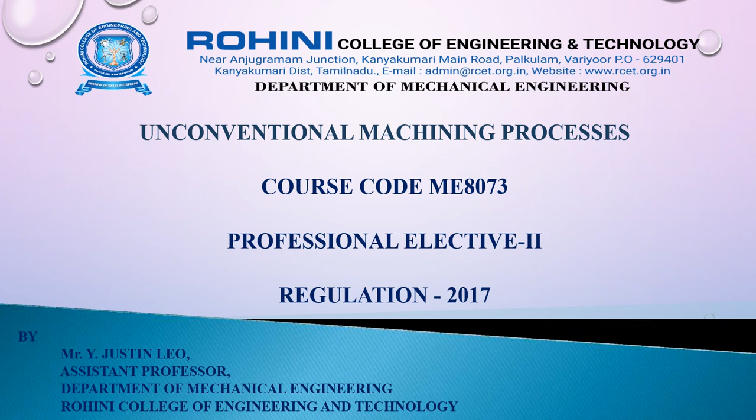And the course code is ME8073, and it is a professional elective subject for the mechanical engineering students, Regulation 2017. So here in this video session, we'll be studying the first unit, that is Introduction and Mechanical Energy-Based Processes, in which we'll be studying about mechanical energy-based unconventional machining processes.

So the main objective of studying this unconventional machining process is to learn about various unconventional machining processes and the various process parameters and their influence on performance and their application. So here in the first unit, Introduction and Mechanical Energy-Based Processes, we have the syllabus: Unconventional Machining Process, its needs, classification, merits, demerits, and application.

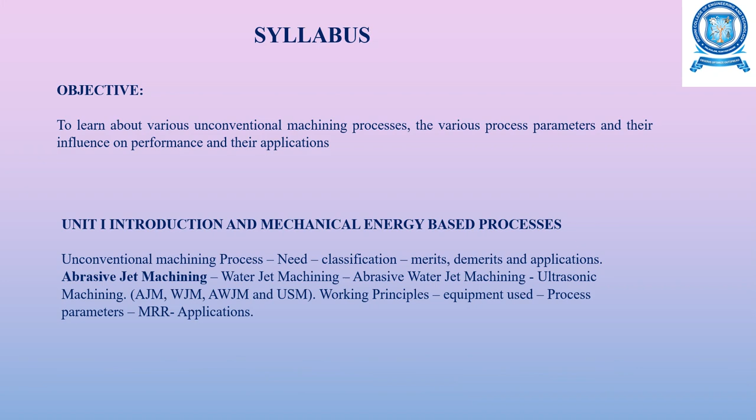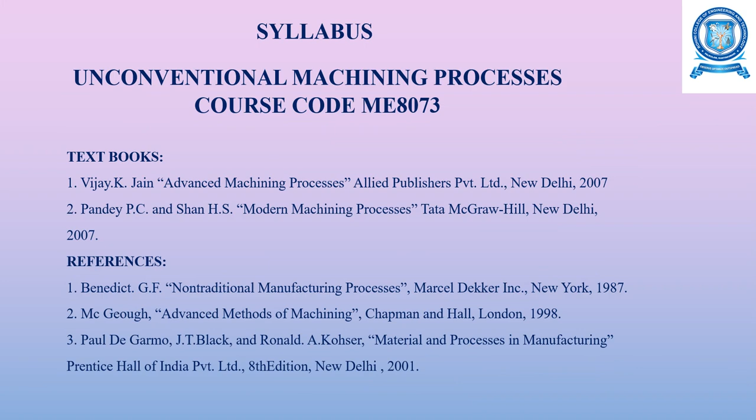And in the mechanical energy-based processes, we'll be studying about abrasive jet machining, water jet machining, abrasive water jet machining, ultrasonic machining, and the working principles, the equipment used, the process parameters, and its applications. So these are all the textbooks and the reference books for this course. So these are all the course outcomes.

So the students, upon completion of this unconventional machining processes course, in the first unit, will be able to explain the need for unconventional machining processes and its classification. In unit 2, the students will be able to compare various thermal energy and electrical energy based unconventional machining processes. And upon completion of the third unit, the students will be able to summarize various chemical and electrochemical energy based unconventional machining processes.

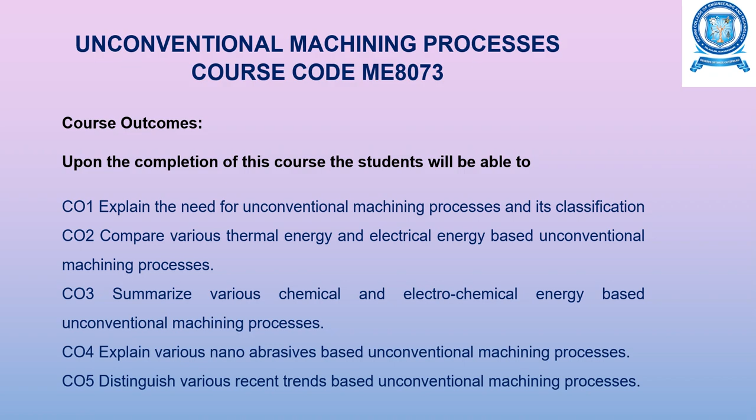In the fourth unit, the students will be able to explain various nano-abrasive based unconventional machining processes. And finally, in the fifth unit, the students will be able to distinguish various recent trends based unconventional machining processes. So in mechanical energy based unconventional machining processes, you have almost 4 types, that is abrasive jet machining, water jet machining, abrasive water jet machining, and ultrasonic machining.

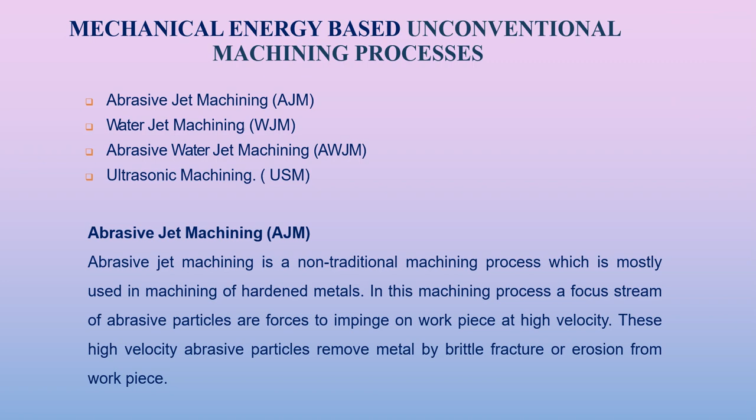Abrasive jet machining is one of the non-traditional machining processes, mostly used in machining of hardened metals. In this process, a focused stream of abrasive particles is forced to impinge on the workpiece at a high velocity. These high velocity abrasive particles remove the metal by brittle fracture or by erosion from the workpiece. In mechanical based processes, we'll be studying about the abrasive jet machining process in this video session.

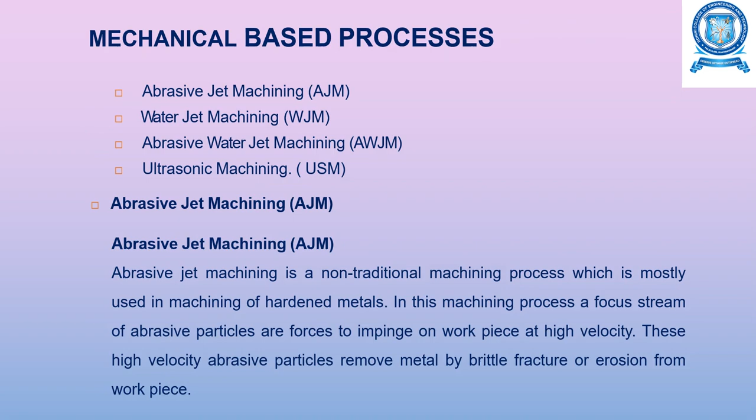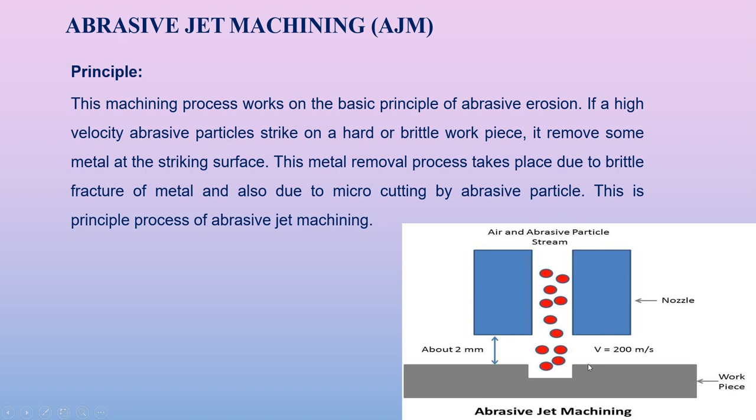The machining process of abrasive jet machining works on the basic principle of abrasive erosion. As you can see from the figure, high velocity abrasive particles are made to strike on a hard or brittle workpiece, and this removes some metal at the striking surfaces. This metal removal takes place normally due to brittle fracture of the metal, and also due to micro cutting by the abrasive particles. This is the principle of abrasive jet machining.

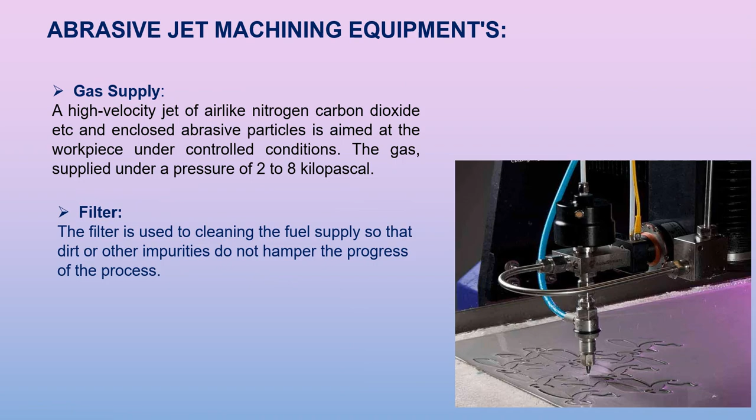So the first is the gas supply. A high velocity jet of gas like nitrogen, carbon dioxide, etc. with enclosed abrasive particles is aimed at the workpiece, under a pressure of 2 to 8 kilopascals. And you have a filter, which is used for cleaning the supply so that any dirt or other impurities may not hamper the progress of the process. And you have the pressure gauge, the pressure regulator.

So it is used to control the pressure of the compressed gas used in the abrasive jet machining, as the pressure decides the depth of the cutting and the amount of force required for cutting. So the pressure gauge is very, very important here.

And you have a mixing chamber, and in this mixing chamber the abrasive powder is being fed, and with the help of a vibrator, the amount of abrasive can be controlled, so that the abrasive and the gases will be mixed thoroughly in the mixing chamber.

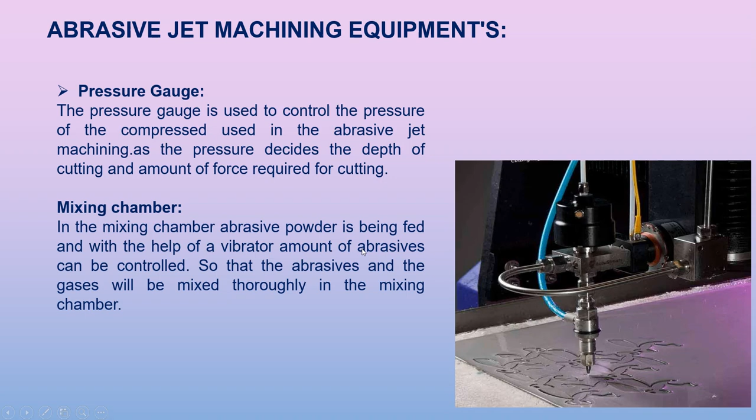So next is the cutting nozzle. You have here the cutting nozzle. To direct the abrasive particles on the workpiece, cutting nozzles are used, and they are mostly made of tungsten carbide, and they may be available in both circular and square cross section, and its life is usually low, about 30 hours for tungsten carbide. And next is the abrasive particles.

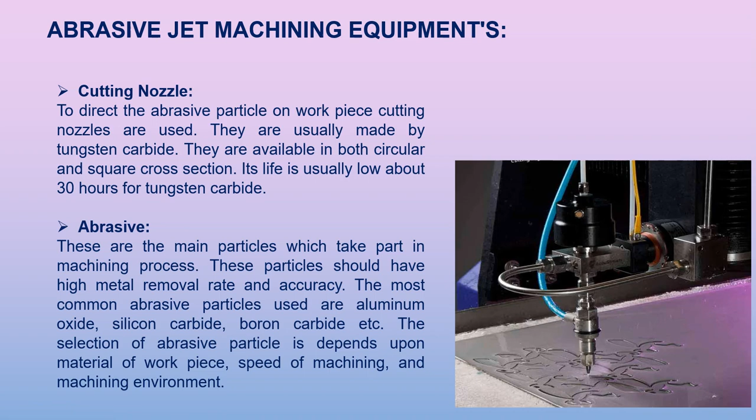So these are the main particles which play a vital role in this machining process. And these particles should have high metal removal rate, and the accuracy should be more. And the most common particles normally used are silicon carbide, boron carbide, and aluminum oxide. And depending upon the workpiece, the selection of abrasive particle is made, and it is also selected based on the speed of machining and the machining environment.

And next is the abrasive jet machining working. So, working process of abrasive jet machining. The basic concept present in abrasive jet machining is nothing but abrasive erosion or metal cutting by high velocity abrasive particles. And the working process can be summarized by the following points. So the first is the gas or air is compressed in the gas compressor. Here the density and pressure increase.

And second, the compressed gas is sent to the filtration unit, where the dust and other suspended particles are removed. And after this, the clean gas is sent to the dryer, and this dryer unit absorbs the moisture from it, and it is used to avoid water or oil contamination of abrasive powder. And now this clean and dry gas is sent to the mixing chamber, where the abrasive feeder feeds abrasive particles into it, and the abrasive particle is about 50 micrometer grit size.

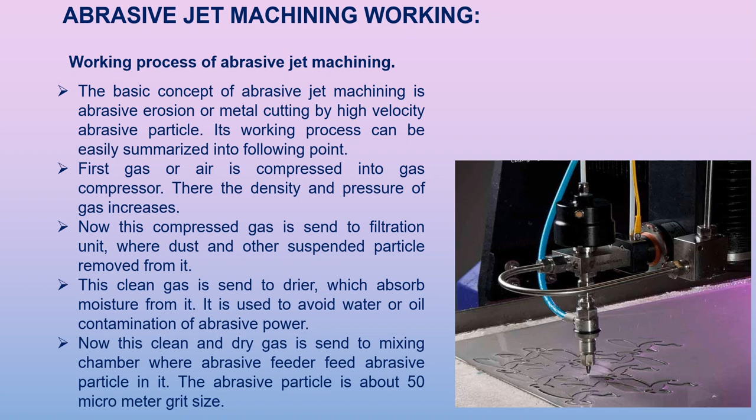So this high pressurized abrasive-carrying gas is now sent to the nozzle, where its pressure energy is converted into kinetic energy. Normally the velocity of the abrasive particle leaving the nozzle is about 200 meters per second. So the standoff distance between the workpiece and the nozzle should be about 2 mm.

Now, these high velocity abrasive particles impinge on the workpiece and remove the material by micro cutting action, as well as the brittle fracture of the work material.

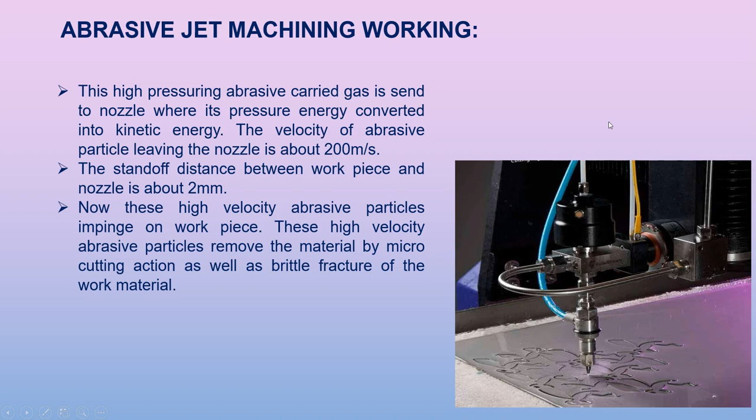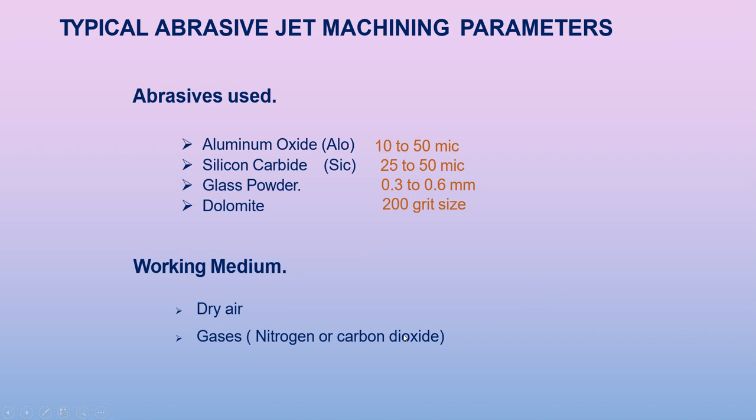So these are all the abrasive jet machining parameters. The abrasives normally used are aluminum oxide, 10 to 50 micron, silicon carbide 25 to 50 micron, glass powder 0.3 to 0.6 mm, and dolomite of 200 grit size. And normally the working medium here is dry air, and gases may be nitrogen or carbon dioxide.

And the nozzle material is normally tungsten carbide or silicon carbide. For abrasive materials, aluminum oxide grit size is 10 to 50, and the orifice diameter is 0.005 to 0.018 inch. For silicon carbide, it is 25 to 50 grit size, and the orifice diameter is 0.008 to 0.018 inch. And for glass beads, the grit size is 2500 micro inch, and the orifice diameter is 0.026 to 0.05 inch.

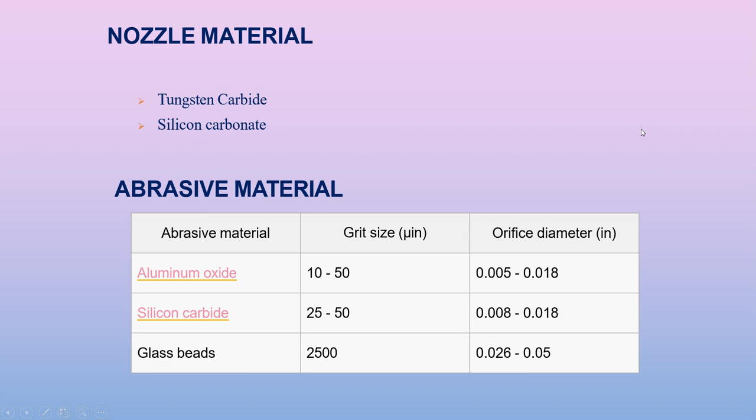So coming to the application of abrasive jet machining, this is normally used in drilling and cutting of hardened metals. It is also used for machining brittle and heat sensitive materials like quartz, glass, mica, ceramic, sapphire, etc. And it is used to manufacture electronic devices, and in deburring small holes and small critical zones in machine parts.